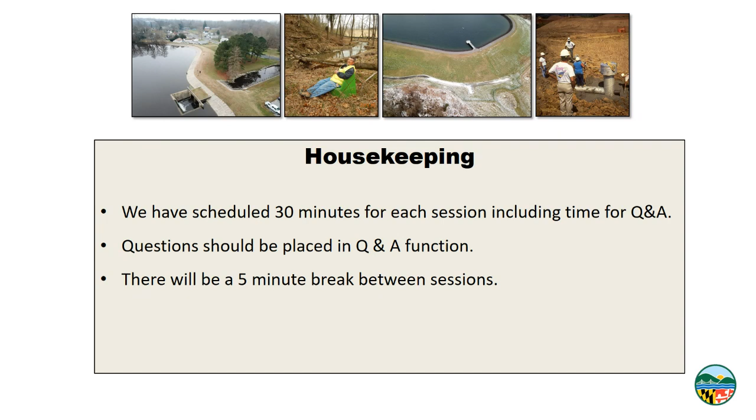Today's agenda is divided into 7 topics. First, Hal Van Aller will talk about hiring a dam engineer. Then Visti Dalal will talk about the lessons learned from the FEMA High Hazard Potential Dam Grant Program. Then we'll hear from John Roach, and he'll be discussing the permitting process. Hira Sharitha will talk about dam ownership and enforcement issues.

And dam safety issues at dams will be discussed by Kelly Flint. John Roach will then come again and talk about dam safety guidance documents. And then finally, Ray Barr will wrap it up with some closing remarks and any additional questions or answers that we have not addressed.

So let me just briefly talk a little bit about what Maryland's dam safety program looks like today in 2021. There are currently 627 dams on Maryland's dam inventory, and there are an additional 15,000 or so small ponds in Maryland. And these are the ones that we know about. There are new, existing, or unknown dams that are added every day to our inventory. Over the past 12 months, we have added 18 dams to the dam inventory that were previously unknown to us.

Maryland dams are spread out across the entire state. There is no county in Maryland that can claim that they do not have a dam within their jurisdictional boundary. The majority of dams in Maryland's dam inventory are low hazard structures, but there are about 250 dams in Maryland that if they failed, could cause significant property damage or kill somebody.

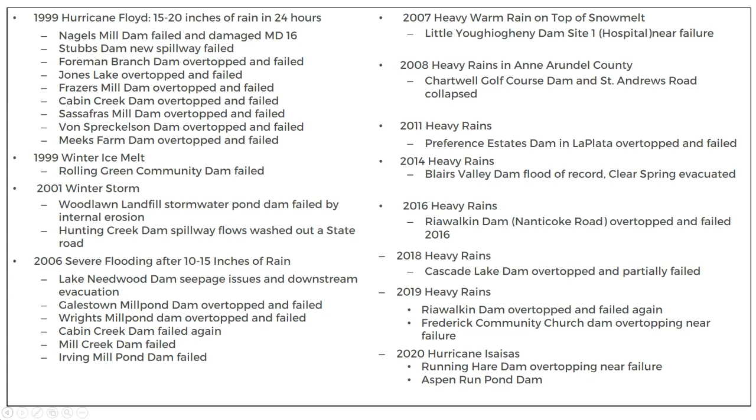Maryland's dam safety program works hard to ensure the safety of our dams and small ponds. And we do this by ensuring designs meet minimum standards, proper construction methods are followed, and our existing dams are maintained. We inspect existing dams and those under construction. FEMA requires Maryland to inspect our 102 high hazard dams once per year at a minimum, and our 148 significant hazard dams at a minimum one time every 3 years.

This year, our inspectors got off to a slow start when in March, Governor Hogan shut down the state due to the coronavirus and ordered all Maryland state employees to work at home. Things started looking better in the early summer when our dam safety inspectors were able to get out to do some field work, albeit with many safety restrictions, such as wear a mask, stay 6 feet apart, wear gloves, and only one person per vehicle. We were able to get to 170 dams. And this allowed us to meet the annual inspection requirement for 71% of our high hazard dams.

This is why your due diligence in performing regular inspections on your dams is critical. Maryland needs you because, as you can see, we struggle to meet our inspection goals. The same dam safety engineers performing those inspections are also reviewing dam safety permit applications, reviewing emergency action plans, providing outreach and training, and performing other critical duties.

What else have we been working on? In addition to dam inspections, our dam safety engineers have been working very hard on some important changes to our dam safety program. In February, we created a new dam safety permits division headed by John Roach. This division will help focus on permit processing updates to ensure efficiency and clarify requirements. We created 11 technical policy memos to help clarify some existing criteria that is difficult to interpret. These are located on our website, and I think John Roach will talk more about these later today.

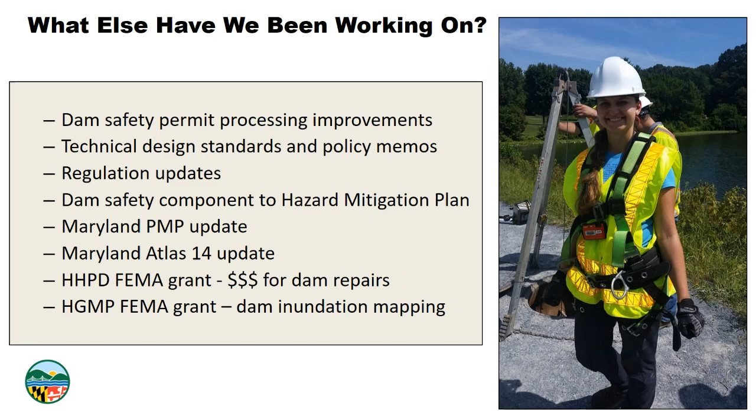Now, as some of you already know, our review responsibilities in the Dam Safety Division have recently had to extend more and more to small pond reviews. Historically, dam safety focused attention on larger dams that present a significant or high hazard, with 378 small pond reviews left to local soil conservation districts. However, circumstances recently have required many of these 378 reviews to shift to MDE through the dam safety permit process. This has impacted the local development process, and as a department, we are working through these issues. We are working to propose regulatory changes.

We also held 3 workshops in the fall of 2020 on small pond design, construction, and maintenance issues. We held a number of small pond coordination meetings and continue to hold these meetings with the local soil conservation districts to discuss small pond approvals and design criteria. And also, as a part of our regulation update, we recently published proposed regulation changes to the delegation authority for small pond approvals to allow MDE to designate an entity other than a soil conservation district to approve small ponds.

We are also currently discussing thermal review issues with the Department of Natural Resources for small ponds located in natural trout watersheds. And we hope to get some written guidance for local review authorities and soil conservation districts on what is required for small ponds located in these cold water streams.

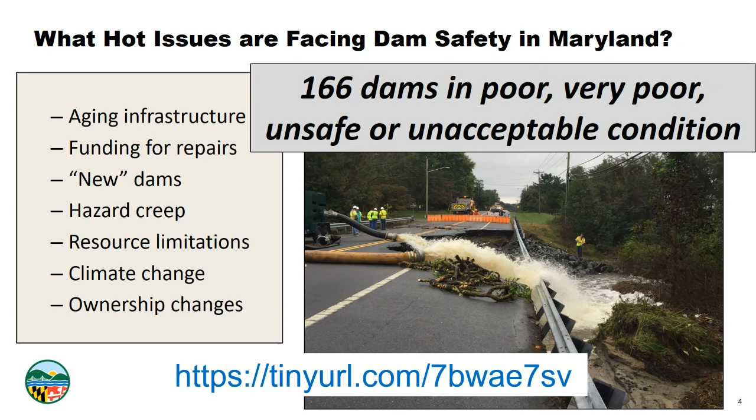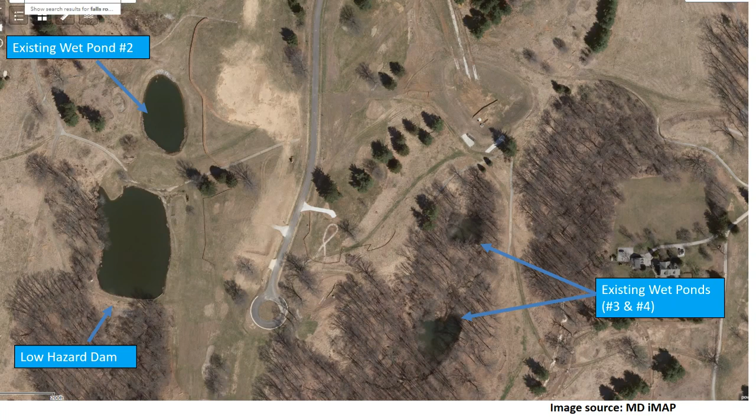Here's another recent example. In this case, there were 4 old ponds on a large parcel. One of these ponds was on Maryland's dam inventory. Now, recently, this large parcel was approved for a residential subdivision. Multiple single-family lots were created and sold, some that bisected the ponds and the low hazard dam. The property owners of the new lots had no idea they were now dam owners. In addition, forest conservation easements were recorded over these existing dams.

For those of you who are engineers providing design services for developers, please recognize that any existing dam or pond on the property must be maintained in good condition, even if it is not going to be used to manage new development stormwater runoff. Repairs to these existing structures should be required as part of the subdivision process. If you find one of these structures and you are concerned about notifying the existing property owner of the issues, contact MDE. We can assist with ensuring compliance.

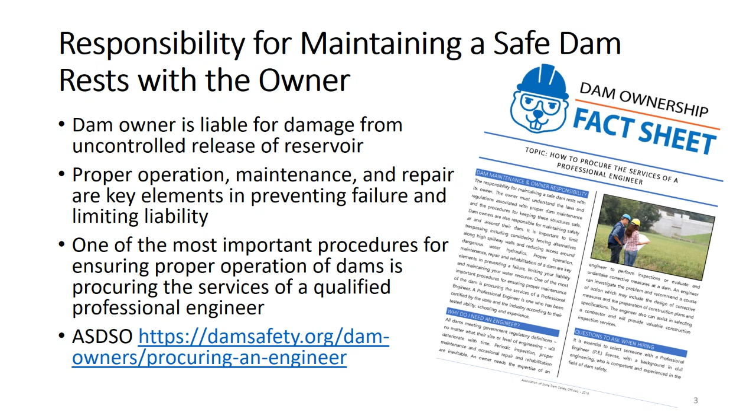There are some things that are not required to get a permit or an engineer, such as removing debris from a spillway, removing accumulated sediment from forebays and low flow openings in your spillways, replacement of construction joint sealants, maintaining existing toe drain systems or internal drain systems, or installing seepage measurement devices, operating and exercising drain gates if you're just going to open and close it to make sure it works,

replacing riprap, erosion protection material on the upstream face of the dam up to 10 square yards, and filling in animal burrows. These are all things that we expect dam owners to do. There's more details that you can find on all of these activities, ordinary activities, in MDE Policy Memorandum number 11.

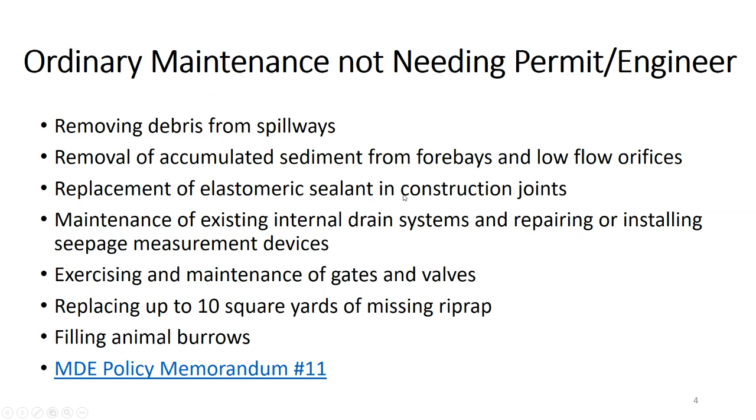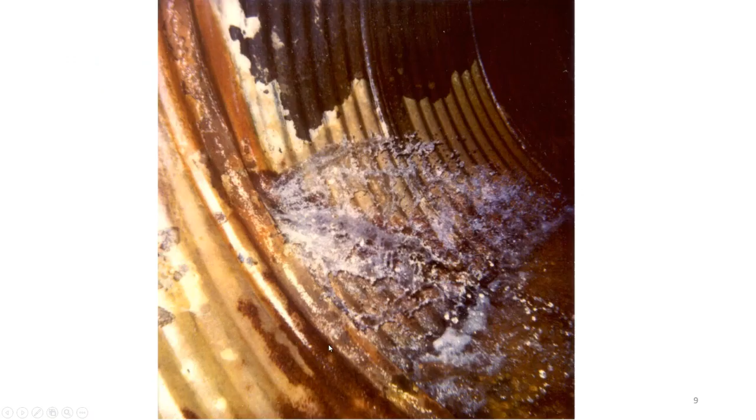If you inspect your pipe and you find some leakage, you're going to need help from an engineer. Here's one where the pipe is about a 48-inch diameter corrugated metal pipe installed in 1964 in Carroll County. The soils in Carroll County and a lot of parts of the state are very corrosive and aggressive, and corrugated metal pipe only lasts about 25 to 30 years. So this is well beyond its expected design life.

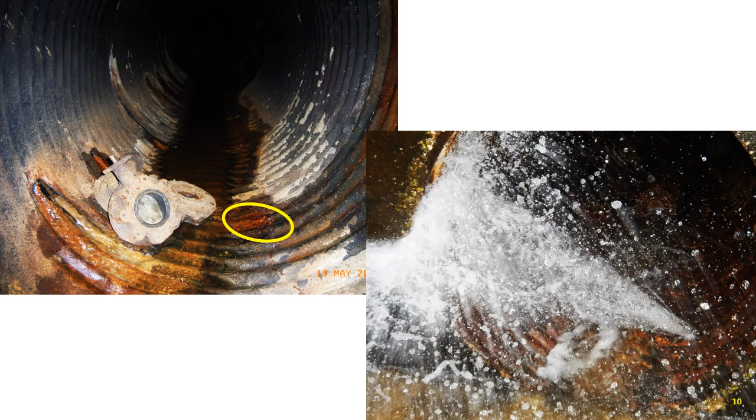When we looked at this dam in 2010, you could see corrosion. Right here in the circled area, there is a little bit of orange color and deterioration. But when we looked at that pipe again in 2017, that circled area had completely failed, and there was about a 2-inch diameter hole where the reservoir was coming into the pipe.

Let me just check. I'm getting a lot of messages here. Should be okay.

So the problems that do require an engineer. If the state has done an inspection and we've said that your dam has an inadequate spillway, it could be a change in hazard classification called hazard creep. As Jennifer mentioned, maybe a subdivision has been built around and downstream of an existing pond. So the pond now becomes a dam that might be something other than low hazard. If you look in COMAR, the spillway capacity requirements for a significant or high hazard dam are much larger than for a small pond.

We might have determined that the emergency or auxiliary spillway is subject to erosion. There have been a bunch of failures of large NRCS type dams with earth emergency spillways that failed by erosion when they were called into use during a large storm. In some cases, a 50-foot high dam with an emergency spillway failed all the way to the bottom of the dam and the entire reservoir was lost. It's possible to increase your spillway capacity by putting overtopping protection on a dam, but that's tricky, requires special design and an engineer that knows how to do it.

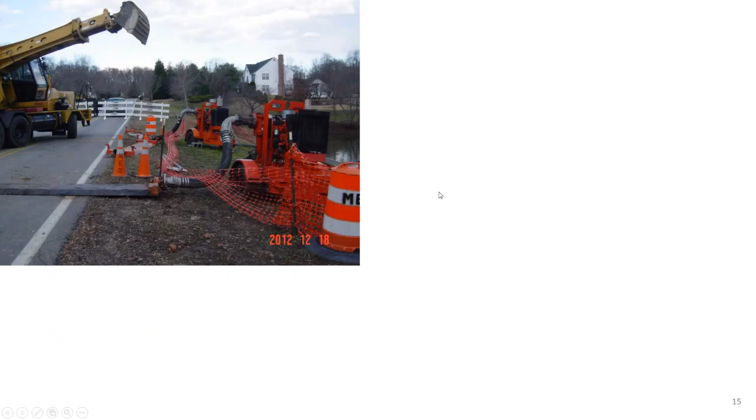There's a case in Calvert County where the dam serves as a community roadway, and the engineers elected to replace the deteriorated pipe with a slip liner, not replace it, but to repair it in place, because they didn't want to disrupt the traffic on the road in the community. However, a few months after the slip lining project was completed, we got a call from the homeowners association that said every time it rains, the lake level increases and it never goes down, and there's no water coming out of the pipe. What's going on?

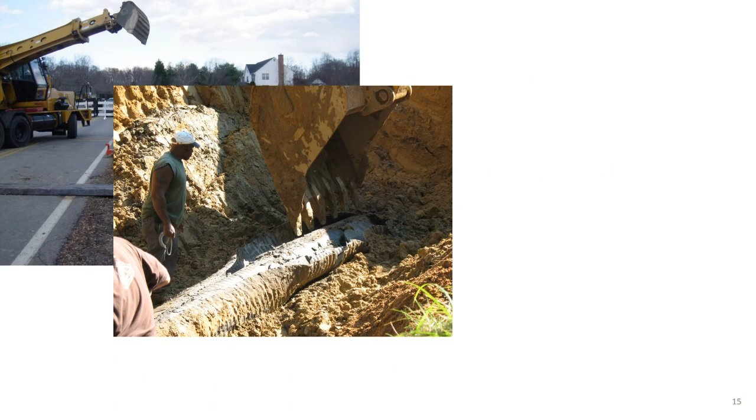So they had the engineer and a contractor come back, and they had to dig up the pipe because there was obviously a problem with it. No water was coming out. And this is at the downstream end. Corrugated metal pipe was excavated, and they split it open and found that when the contractor was pumping grout into the annular space between the old CMP and the new liner, they used too much grout and too much pressure and actually collapsed the brand new slip liner and filled the pipe up with concrete, basically, so that there was no way for water to get out. So they ended up digging up the road anyway to replace the pipe.

This particular incident resulted in the recommendations in our guidance document for slip lining to make sure that somebody is watching the conduit from both ends, or at least that you can see through it while the grouting is going on, to make sure they can stop in time before the pipe is completely filled with grout.

Lots of problems with pipes. Here is a dam that was constructed in Missouri. It was a pretty large, like 24-inch PVC pipe that the contractor installed as a temporary diversion pipe that they diverted the stream through while they built the embankment. And at the end of the project, the contractor and the owner decided that they liked having this PVC pipe through the embankment as a low flow opening. So they approached the state for permission to maintain it instead of grouting it closed like the construction documents required.

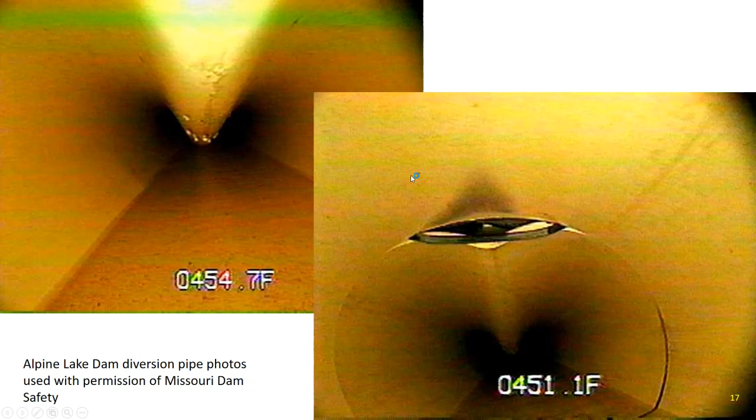So Hira and John are going to talk a little bit about permit requirements for dam construction, alteration, and repair. Maryland law requires that a permit is required for construction or alteration of a dam, any changes to a dam, unless the plans are approved by the Soil Conservation District. And as Jennifer mentioned, there is a change that would allow certain designated entities to do pond approvals, but we have not entered into any agreements with any entities yet to do that.

A dam safety permit is required to drill borings in or near a dam. John's going to talk about a near failure of a dam in New York State. COMAR, the Code of Maryland Regulations, requires that one engineer, which we refer to as the engineer in charge, be responsible for an entire project from its design, that's from doing the original concept and borings, through its construction. The engineer must be a registered professional engineer, experienced in dam design and construction.

So very few times will one engineer be experienced enough in all phases of construction: geotechnical, hydrology and hydraulics, and structural. So we usually see a design team involved in the project, but one engineer must be designated as the primary engineer in charge. And he should be reviewing all of the submittals to the state, the breach analyses, a hydraulic design, a structural design. It may be done by different people, but it should all come under his authority.

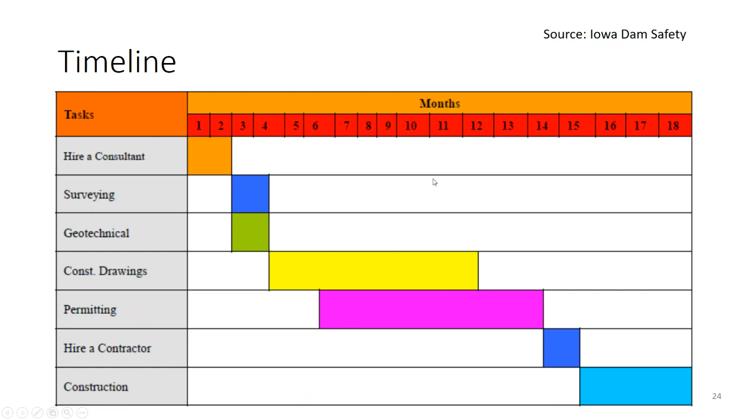So it's recommended that you get references and a portfolio of projects from your engineer and contact those owners and contractors to discuss the engineer's performance. Look at the projects that have been completed under his leadership. And keep in mind that an engineer that claims he's worked on a lot of Maryland 378 type stormwater ponds might not really qualify them for work on high hazard dams. They might be qualified, but somebody that's worked on dozens of small stormwater ponds does not necessarily translate into experience for high hazard dams.

Discuss engineer selection with the dam safety program before you actually pick that engineer and get under contract with them. We can't recommend any particular engineer, but we can give you an assessment of their experience on previous projects. And if the engineer has come up with a recommended course of action, run that by us before you commit to that, because there may be some things that we're not going to approve.

And go to ASDSO's website, and there's other websites, but go to the website about the basics of dam safety and be knowledgeable in regard to the laws and regulations with which you need to comply, so you know if the engineer is going to satisfy those requirements.

Other activities that might require an engineer: annual dam inspections. Certainly dam owners are expected to do inspections of the dam, but you should probably have an annual inspection done by a qualified engineer. And we're also suggesting that every 5 or 10 years an engineer do a top to bottom inspection and evaluation to look at the original design assumptions, evaluate the spillway conduits, geotechnical conditions, slope stability, foundation, seepage,

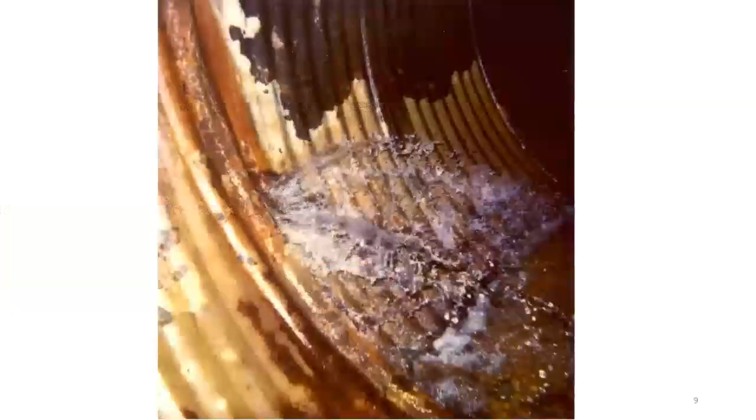Should that be from the top of the dam to the invert of outfall elevation? I think it's before this. Keep going. Before this, like maybe 1 or 2. There it is. Yes. Okay. So that is a very good question. Okay. Are you finished with the? Yes. Okay. Yes, I'm sorry.

It was built by an environmental contractor that was good with landfill remediation, but they didn't know anything about stormwater ponds, and the engineer that was involved was an environmental engineer and didn't have any background in dam safety. The height of the dam measurement is a big issue that we hope to clarify. I think it might be in the guidance documents that John has put together and that are on our website now. And I think NRCS measures it to the middle of the embankment. So anyway.

Okay, the next question, Hal, is you mentioned CMAC. The question is, what is a CMAC device and what does CMAC stand for? There was a written response that says CMAC stands for Continuous Monitoring and Adaptive Control Ponds. Trademark names include Opti, Smart Pond, and Real-Time Control. Did you want to add anything to that, Hal?

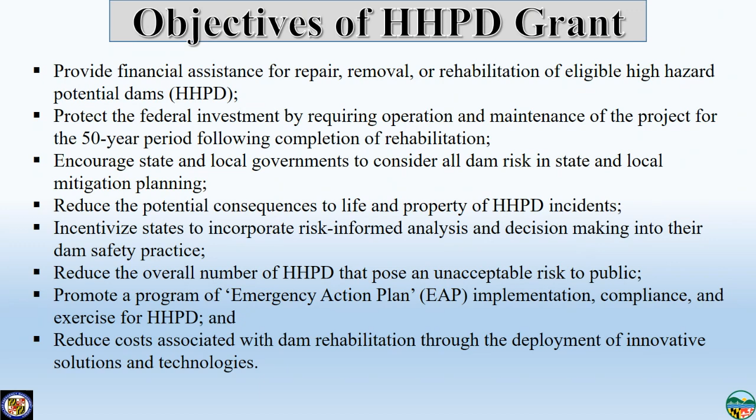Now, this is the $1 million question. Who is eligible for this grant and who is not? All federal dams are not eligible for this grant. Dams built by USDA, Department of Agriculture, those dams are not eligible. Projects that increase water supply storage capacity, they are not eligible.

You cannot use this fund to just do regular maintenance and repairs to your dams, even though they are high hazard dams. Any modification to a dam that does not improve the safety of the dam, that's a big condition. And the onus has been provided to the dam safety program for each state. We have to determine if that dam is unsafe or not.

And we go through the whole rigmarole to find out if those dams are unsafe. And only then we make them eligible for this grant. So it's a very intricate and detailed process by which the dam safety program delineates the dams which are eligible for this grant. Licensed hydroelectric dams, modifications to produce hydroelectric power, those dams are not eligible either.

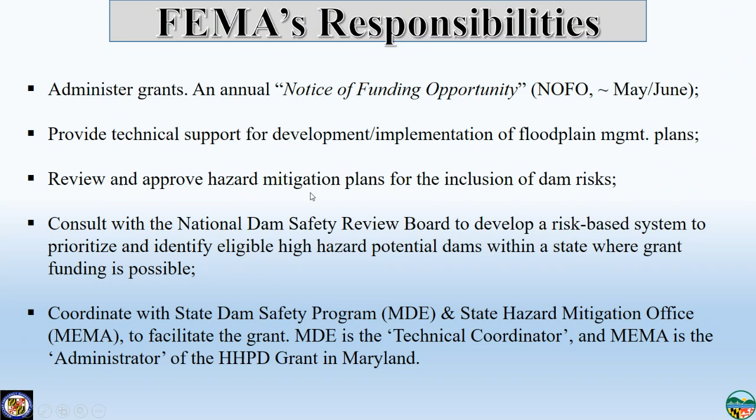They coordinate with our sister agency MEMA and with MDE to make sure that all the I's are dotted and all the T's are crossed before the award is given. So working with FEMA has its own ups and downs. What is the role that MDE plays in this grant? We are the technical coordinators. I am the manager of this grant at MDE. We develop and prioritize the list of unsafe dams, high hazard dams in Maryland.

Last year, we spent a considerable amount of time going over the dams we thought were unsafe. We read through the reports, technical reports. We talked to the managers of the dam, made sure they were aware of this grant, as well as they wanted to work with us on these projects. So they were on board to apply for this grant because there's a big commitment from them to do all the things that I'm going to go over.

The first thing is there's a cost share of 35%. So it can be in cash or in kind. And the dam owner has to make the decision whether they have the resources and the time to commit to this funding. They need to have an updated EAP we talked about. They also need to have a county-wide hazard mitigation plan. Now, if you don't have that hazard mitigation plan, that's a lot of time investment as well as the cost.

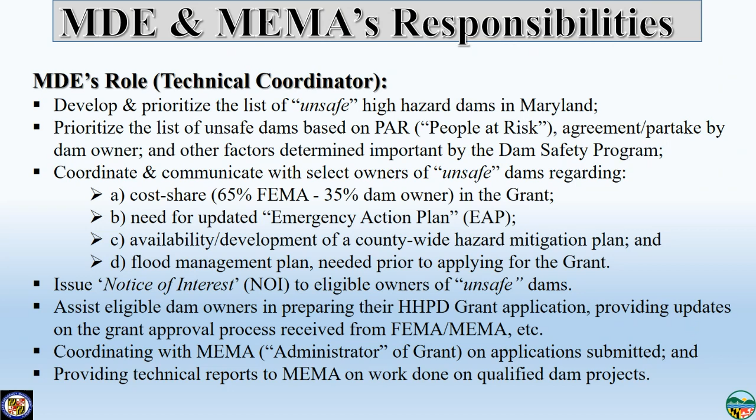So what is MEMA's role? MEMA is our administrator, and we are very happy that they are on board because we do not have the resources that MEMA has. MEMA works with FEMA on several grants. So they have the medium of not only communicating with FEMA readily and efficiently, but they also have the grant application process down pat. They know how the money comes in, how the money goes out. And so we are very happy and appreciative of MEMA's role as an administrator of this grant, and we work closely with them.

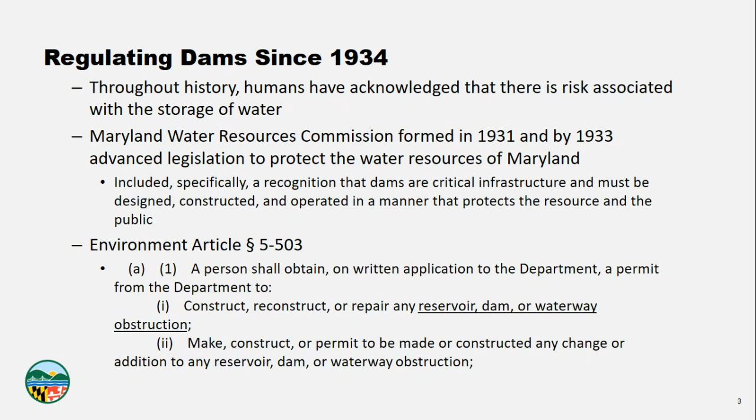In fact, the law, while the language or maybe the citation has changed slightly, is still largely the same. It still says that a person shall obtain a permit to construct, reconstruct, or repair any reservoir, dam, or waterway in the state of Maryland. And that language is important too, because notice it specifies reservoir as well as dam. So changes in the area that's being impounded by the structure could trigger a requirement for a permit as well.

So this regulation provides the state with checks and balances to ensure the needs of water users as well as the downstream public are protected. Permitting helps ensure that alterations to a dam become part of its permanent record, right? These structures last not 5 or 10 years, but decades, maybe centuries or longer. And we keep a permanent record on each dam, and owners and their engineers refer back to that history as they're doing a rehabilitation or repair project, because it enlightens you on how this project was constructed and operated over time.

Permits also provide the opportunity for public comment. People should be aware; there's kind of a community right to know. If you're building a high hazard dam in their community, people at least need to be aware of that risk that exists out there.

Now, in our current format, the permits that we issue in dam safety also serve as an operating permit. Some states do it differently, where they'll have an operating permit, which is different than a construction permit. At the moment, ours is one and the same. So when a project is done being constructed, the permit doesn't go away per se. It lives on through those operating and maintenance obligations for the owner. So that's how we ensure that dams continue to be operated and maintained acceptably.

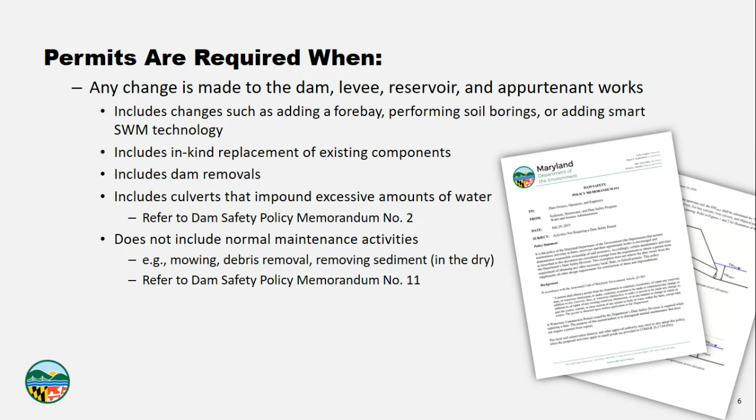We've spelled out a list of some of these normal maintenance activities in our policy memorandum number 11, so you can refer to that. All of these policy memorandums that we've discussed, that we'll be discussing today and on Thursday, are available on our website right now for you to refer to.

So the question then comes to, is it a dam or a small pond? If you have a dam, you need a permit to be issued through the Maryland Department of the Environment Dam Safety Program. If you have a small pond, you probably can receive approval by the local soil conservation district. And notice the language is a little bit different there. It's an approval versus a permit. And there's some things in law that have some slight differentiations between the two.

So how do you know if you have a dam or a small pond? Well, if the answer to any of the four following items is yes, then you have a dam and you need to go through permitting through dam safety. So if your height is over 20 feet tall, measured from the downstream toe to the crest, you have a dam. If you have a drainage area over 1 square mile, you have a dam. If you can store more than 50 acre-feet of water, and that's up to the brim-full elevation, you have a dam. And lastly, certainly, if you have a high or significant hazard structure, it's a dam as well.

Now, if you answer no to all of those, it's a small pond, and you can probably receive approval by the local soil conservation district, or for state and federal projects through the plan review division here in MDE. But there are a few quirks in laws and regulations that we have to be aware of. So if you have a pond located in a Use 3 watershed, you need to get a permit from Dam Safety. Jennifer touched on this a little bit. We have a regulation change underway right now to remove this requirement and allow small ponds in Use 3 watersheds to be approved by the SCD. So that will change, hopefully in this calendar year.

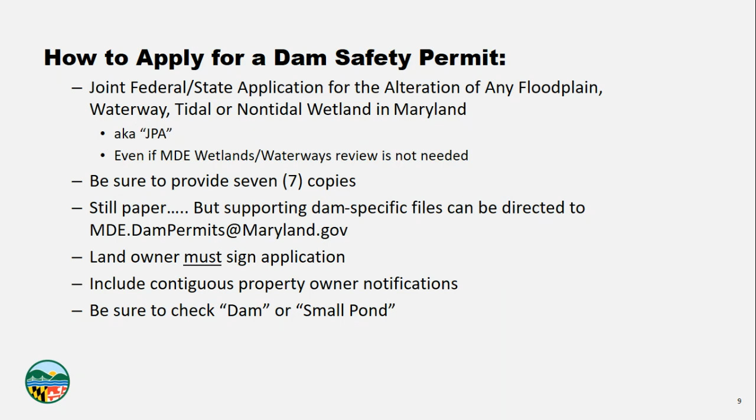I'd also note that you want to include contiguous property owner notifications. And a lot of times people say, well, this is a repair job or a maintenance job, and there's boxes to check in the joint permit application, the second page, about type of work. Please check that dam or small pond box if you have one of those on your structure. It just helps ensure that when these are screened by MDE staff and then routed to all the appropriate divisions, dam safety gets it. They're pretty good, but occasionally projects slip through the cracks. And if it slips through the cracks and we don't get it, that's time wasted on everybody's part. So we want to make sure it gets automatically routed to dam safety.

Okay, so that's the who, what, where, when, why, and how. Now we're going to talk about what do you need to submit. And that's another question we get a lot. Part of this has been addressed on our FAQ on our website, but we'll dive a little deeper. So what do you need from us to get the permit? And I will note that it does kind of depend on what you're doing, right? A permit to construct a brand new high hazard dam is going to be different than a slip lining project for a small dam or a concrete maintenance project on a medium sized dam. So it does depend generally on what the project is.

That's why it's important to hire a qualified engineer and work on a mutual scope development. And when I say mutual scope development, I don't just mean between the owner and the engineer, but sometimes bringing dam safety in early is really important. It can help build familiarity with our understanding of the project, but we can also advise on scope or permitting expectations based on past project experience, and provide our best professional insight to help you make sure that the project will get off the ground and go smoothly.

On occasion we request information for review, and engineers say, well, that wasn't in my scope. And to be quite honest, that's not our problem. It's something we need to do the review, so we need to make sure that we avoid those issues or prevent them altogether, to make sure that what you need to submit is known early on in the project. That being said, here are some general submission expectations.

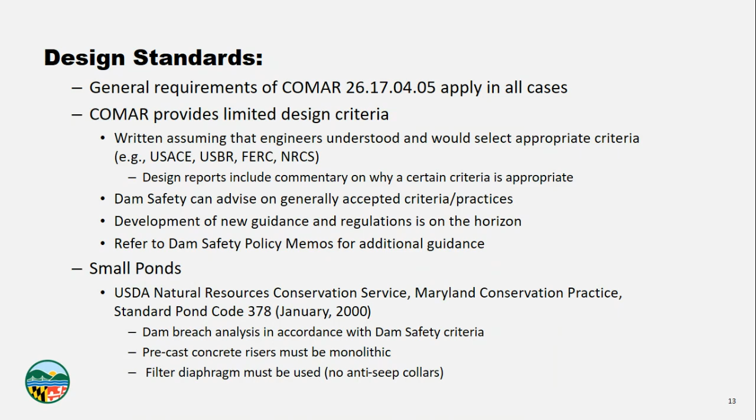And lastly, anti-seep collars are a no-no. They've basically fallen out of favor with federal agencies and many states, now going on almost 40 years. So we're looking to see filter diaphragms be used.

All right, let's talk a little bit more about the engineer in charge. Hal mentioned this briefly earlier. The engineer in charge is a regulatory requirement, and they're basically responsible for ensuring that the design and construction conforms to the high standards of competence in the specialty of dam design and construction.

For all of us who are engineers out there, a lot of this stuff wasn't taught in college. It's experience gained through mentors like Hal Van Aller, who we're going to miss so much, and other colleagues, knowledge sharing, educational seminars like that. So we're looking for that engineer in charge to have obtained that experience during their career. And we want them to be responsible from project planning to construction closeout.

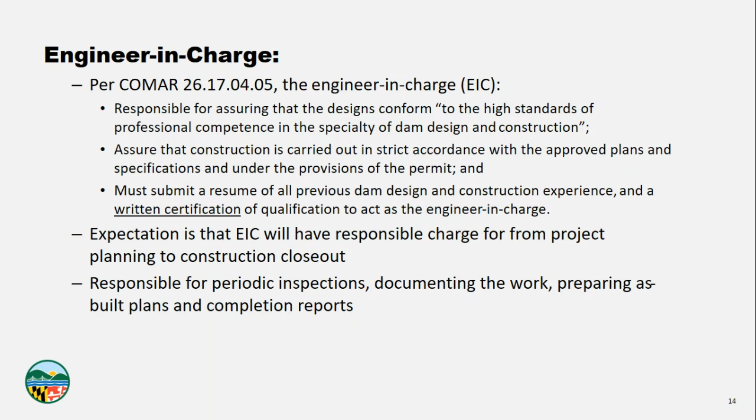One point of contact, so that let's say a design change needs to be made in the field, the person who's aware of all the design considerations during the project planning should approve that design change in the field, because if you make that design change without referring back to the designer, you may be missing something. There may be a gap there, and that can cause problems. And this engineer in charge is also responsible for coordinating periodic inspections of the construction, documenting the work, and preparing the completion documentation as well.

All right, the Memorandum of Land Restrictions. I want to talk about that also briefly because it's kind of a mystery to some folks. The Memorandum of Land Restrictions is actually required by law when you get a permit from dam safety, so it's not something that we can waive. It's a document, it's a legal instrument that's filed with the land records on the property or properties upon which the dam is located. And basically what it says is that as a dam owner, I affirm that I will abide by the applicable laws, regulations, and permit conditions, provides right of entry for dam safety to perform our necessary duties. But most importantly, we think, is that it helps ensure that future owners are aware of their obligations.

So when they do a property transfer and perhaps there's a title search done, which is fairly standard practice, this should come up flagged to that parcel, and the owner will be able to be aware of their obligations. That's so important. As Jennifer mentioned, these farm ponds, which are passed from farmer to developer, now to HOA, there's a disconnect and people lose the understanding of what their obligations are. Because it runs with the land, it must be signed by the dam owner.

And I will say that certain entities, I don't mean to say they're more sophisticated or not, but some owners, because it's a legal instrument, will want to go in depth and have this reviewed by lawyers and do deed searches and all that stuff, and it can cause project delays. Some owners sign right here and get it notarized and they'll send it off. So be aware as you're planning your project, get that MLR out there early, not at the last minute.

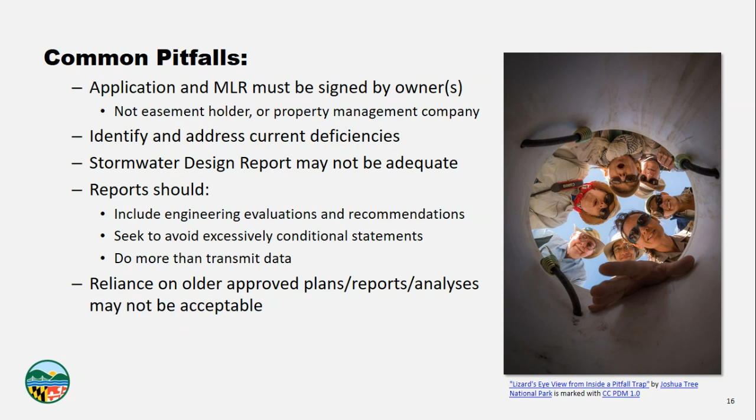Get that confirmation. Lastly, I want to say that while older plans, reports, and analyses are a huge wealth of information, reliance solely on those documents may not be acceptable or adequate. Things could have changed, hazard creep, you know, we've got old methods of analysis that may not be appropriate anymore. So use those, but remember to verify with updated current analyses.

Okay, so we're coming close to the end of the conversation here, and people always ask, well, how long is it going to take to get my permit? You need it now. I feel you, I understand that. As we all know, there's elements of work that add time, and there's elements of work that reduce time. Clearly, we're all working under the stresses of COVID, working from home, dealing with childcare issues. That is a universal time adder, let's say.

But we also have things that slow our work down, so I'm pointing them out just so that we can all, you know, right the ship a little bit. So things like the completeness of the application can slow us down. If we receive something that's not complete, it takes us longer. Also recognize that we have obligations to do coordination with other agencies and public notice, and those, because they're somewhat out of our control, can add time, and we have to factor that in. Lastly, of course, we all struggle with it. It's maybe not the best excuse, but our workload and permit volume can affect our turnaround times.

And Jennifer mentioned we're down quite a significant number of staff right now, but we are hiring and we're advocating for more staff. So things we're trying to improve is education and outreach like this, so you have a little more awareness. Our policy memos help provide a better roadmap for expectations. And then we're doing things like internal process improvement just to streamline work. We're looking for continuous improvement here, right? We don't want to just sit and sit and then all of a sudden launch a whole new system that may be great. We want to do incremental improvements. That's kind of the motto of our Dam Safety Permits division.

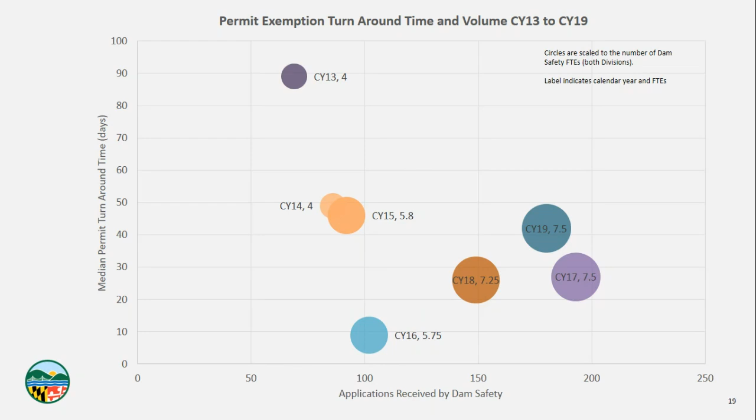Okay, so permit turnaround time. Now we're looking at this same setup. Median turnaround time on the vertical axis, although the scale is a little bit larger, and the number of applications received. Again, you'll notice we've staffed up in response to the larger amount of permit applications we've received. Unfortunately, those FTEs, you just see the number after the calendar year is our annualized full-time equivalents and staffing. It's now dropping below that 7.5 we've seen before, but we've been able to drive down permit turnaround times.

But this gives you an idea of approximately how long it takes for a, quote, typical project if we receive everything that we need to in a timely manner. I will say, though, let's say you are building a brand new high hazard dam, starting from scratch. A perfect example was in 2016 with the Mount Soma Reservoir in Harford County. It took, I think it was like 2 years and 3 days exactly from when we first started talking about the project. This is before they had even selected a site to issuance of the permit.

But there's so many things. We've talked about the pitfalls and other issues that can slow the turnaround time down. So it's a shared job, right? We're trying to do our best to be efficient and turn things around and respect the rules and regulations and safety of members of the state. But the better we can get from applicants, it helps us facilitate being efficient.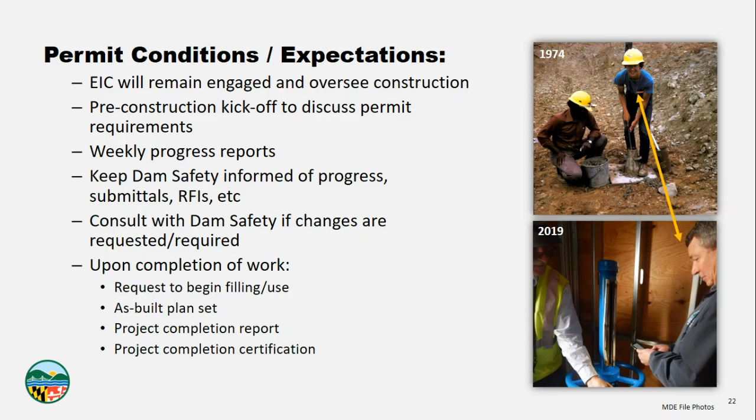And later on in these seminars, we'll talk about what's the role of engineers and dam owners as you operate and maintain your dam after it's been constructed. So that's what I have for you.

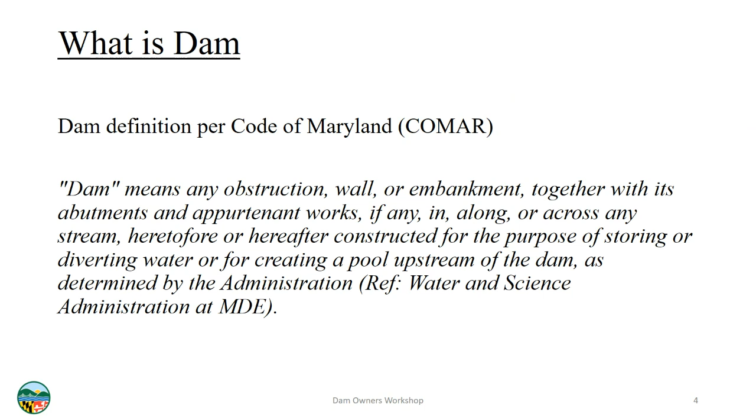the administration. The purpose of the dam might be public drinking water supply, irrigation, flood hazard control, recreation opportunity, power generation, and stormwater management facility. There are 3 types of hazard classification in Maryland: high, significant, and low hazard. Dam hazard is classified by the downstream hazard condition if failure of the dam occurs, not the structural configuration of the dam.

High hazard dams mean the probable loss of human life, and probable extensive property damage to residential, commercial, or industrial buildings and downstream roads. Significant hazard dams have the possibility of loss of life and possibility of property, road, and building damage. In a low hazard dam, loss of life and property damage is unlikely. There are 102 high hazard, 148 significant, and 358 low hazard dams in Maryland. In total, 627 dams.

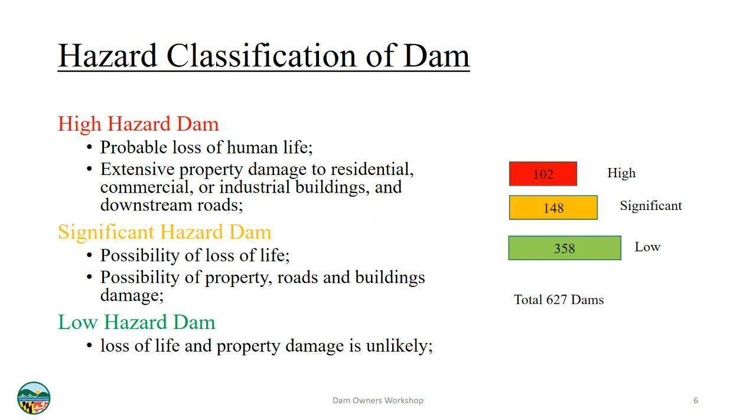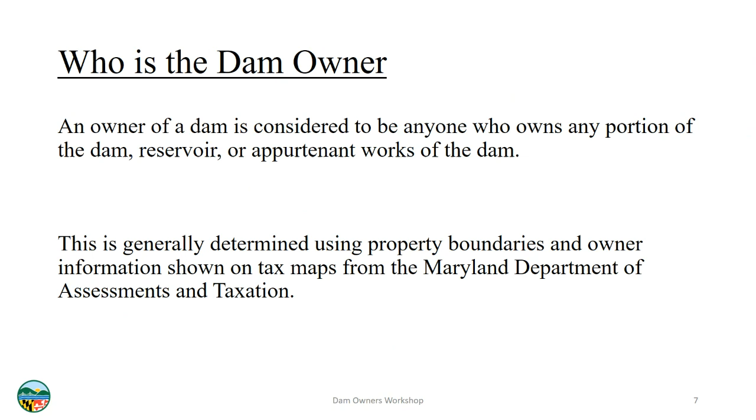Now the question is, who is the dam owner? The owner of a dam is considered to be anyone who owns any portion of the dam, reservoir, or appurtenant works for the dam. This is generally determined using the property boundary and owner information shown in the tax maps from the Maryland Department of Assessments and Taxation. Who are the dam owners? Types of dam owners might be federal, state, county and local government, water companies, private corporations, homeowner associations, multiple dam owners if the dam is owned by multiple property owners, and individual owners.

Now I'm talking about dam owner responsibility. Dam owners need to know the basics of the dam, regularly inspect the dam, and do the operation and maintenance of the dam in a safe and effective manner. They must understand the current laws and regulations associated with the dam, ensure public safety around the dam, have knowledge about the risks and liabilities associated with dam ownership, develop and update the EAP for high and significant hazard dams, and hire a qualified dam engineer for any engineering works. And they should be capable of financial planning to ensure adequate funds are available.

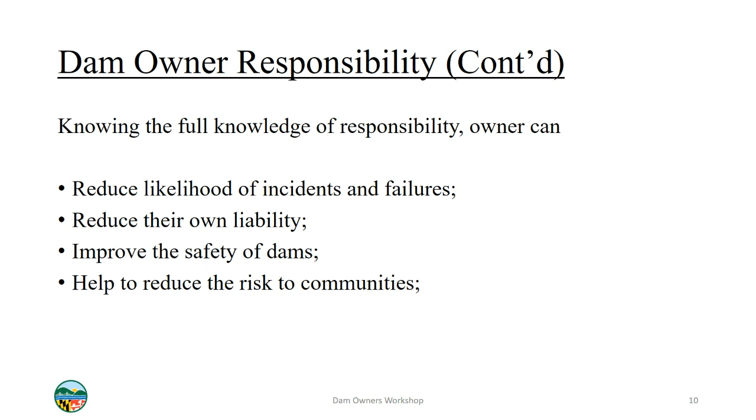With full knowledge of the responsibility, the owner can reduce the likelihood of incidents and failures, reduce their own liabilities, improve the safety of the dam and help reduce the risks to the community. On dam owner liabilities, the dam owner is liable for damage resulting from the dam's misoperation or failure that would result in a sudden release of water downstream. The owner can face reconstruction cost and possible liability for downstream damage. So safely maintaining a dam is a key element to preventing failure and limiting the liability the owner could face.

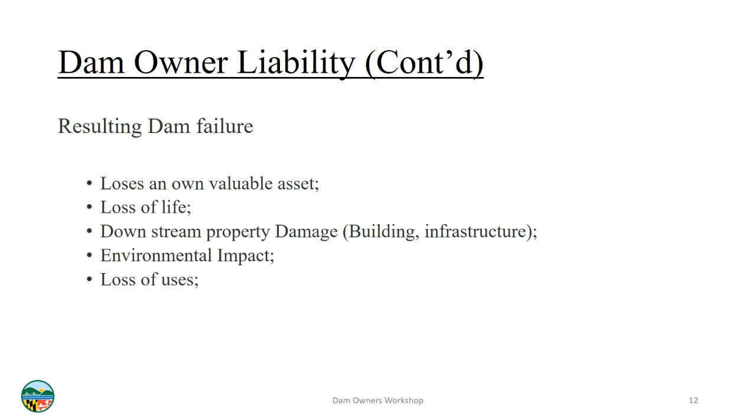Resulting from dam failure, there are losses of the owner's valuable assets, possible loss of life, downstream property damage, environmental impact, and loss of usage. Liabilities can be minimized by avoiding negligence, obeying the standard of duty, properly operating and maintaining the dam, keeping safe conditions in and around the dam, and updating the emergency action plan.

There are some common dam owner issues. Mainly in government organizations and public companies, the person in charge or manager changes, transfers or retires. In a homeowner association, the person in charge or the management might change. For the individual owner, there is transfer of ownership and sale of the property. So the new person in charge or owner will be unaware of the dam safety laws and responsibilities, and sometimes they do not inform dam safety who the new owner in charge is, and it's very difficult to contact the new owner.

I'm talking about the dam safety law. The dam safety laws are found in 5-501 through 5-514 of the Annotated Code of Maryland Environment Article, and the regulations of Maryland dam safety can be found in COMAR 26.17.04.05.

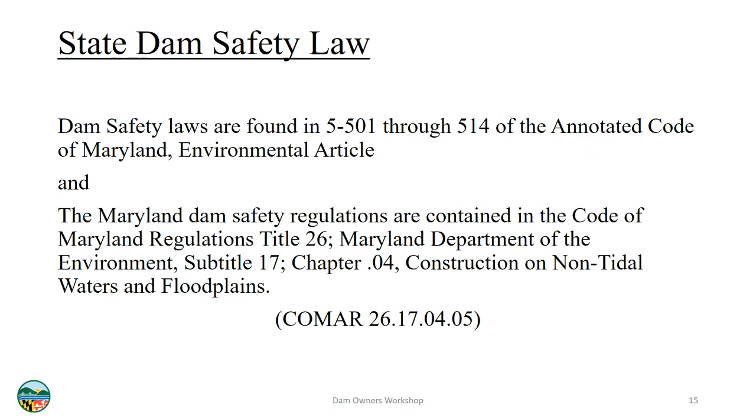And where do we find the enforcement law? The enforcement law we can find in Article 5-509B, which states that on complaint or on the department's own initiative, the department may investigate or examine any reservoir, dam or similar waterway construction. If the department determines that the water infrastructure asset or the dam is unsafe, needs repair or should be removed, the department shall notify the dam owner to repair or remove the dam as the situation warrants within the prescribed time period.

Some basic enforcement steps. The first one is the inspection finding report. This inspection is done by the dam safety staff periodically depending upon the hazard class. In this report, they will ask for certain action within a certain time frame and educate them why this is important. The second is the strict inspection report. This is more legal language, setting very specific actions and times.

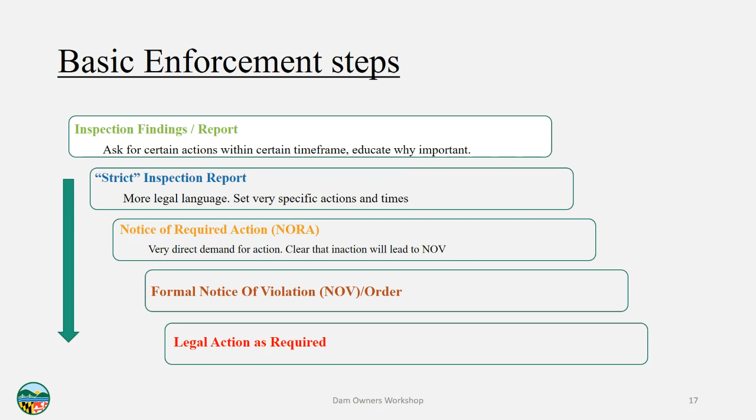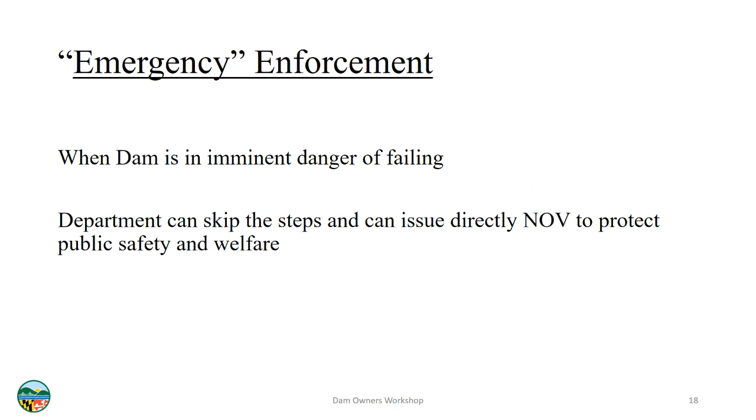One is the notice of required action, a very direct demand for action, making clear that inaction will lead to the NOV. Then the formal notice of violation, and then lastly legal action if it is required. Sometimes when the department feels that the dam is in imminent danger of failing, the department can skip the steps and issue an NOV directly to protect public safety and welfare.

So now I'm going to talk about some cases of enforcement issues in 2020. Case one, the dam owner is St. Mary's County, and this dam is located in St. Mary's County. It is 11 feet tall, 120 feet long, with a 3.1 acre pond area and 3.3 square mile drainage area. And this is a low hazard dam.

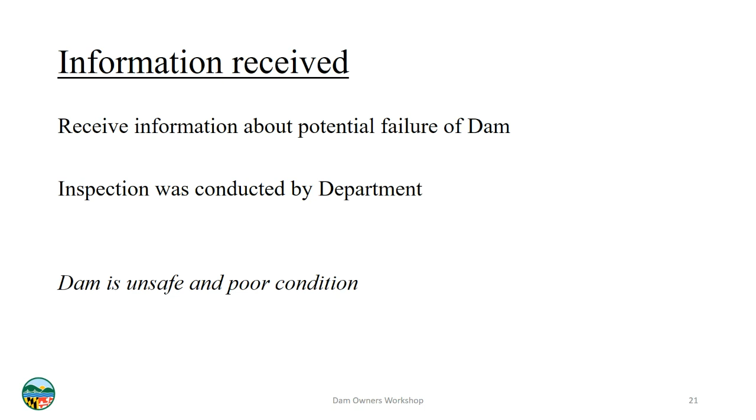The department received information about the potential failure of the dam, so the department conducted an inspection. After the inspection, the dam was found unsafe and in poor condition. These are some findings; I'm showing the photographs. This is the lake level at the time of the inspection. And there is a big sinkhole on the upstream side of the dam near the spillway pipe.

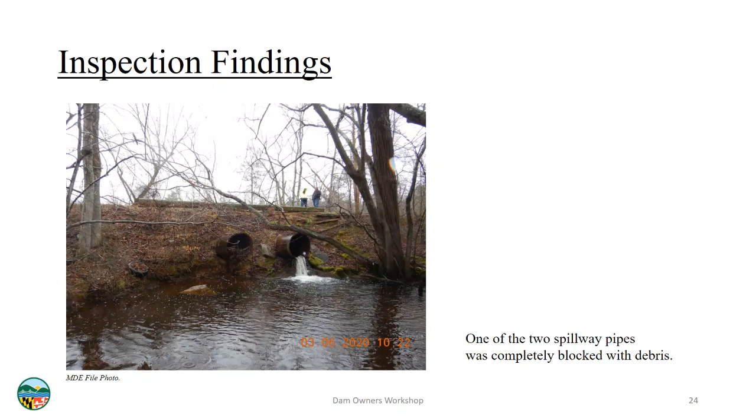And one of the spillway pipes is blocked completely. And there are two wet areas; it seems to be seepage on the downstream side of the dam. And there are numerous trees and woody vegetation on the upstream and downstream slopes of the dam.

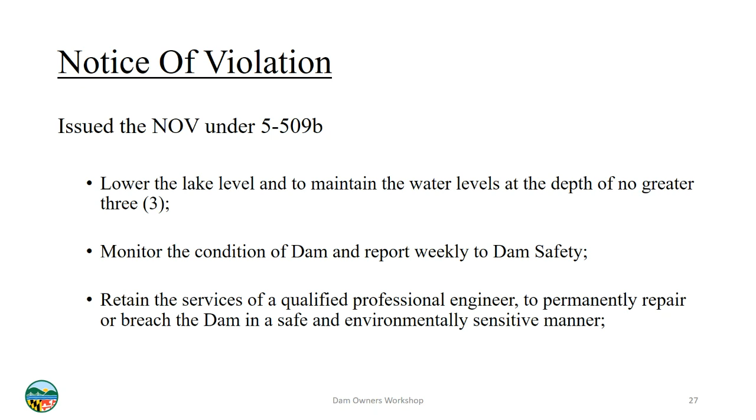So the department issued the NOV under 5-509B to lower the lake level and maintain the water level at a depth no greater than 3 feet, monitor the condition of the dam and report weekly to dam safety, and retain the services of a qualified professional engineer to permanently repair or breach the dam in a safe and environmentally sensitive manner.

And these are the weekly reports that the department is receiving about water surface elevations and the condition of the dam in the eroded area. And the lake water level was lowered by using a siphon and the existing spillway pipe.

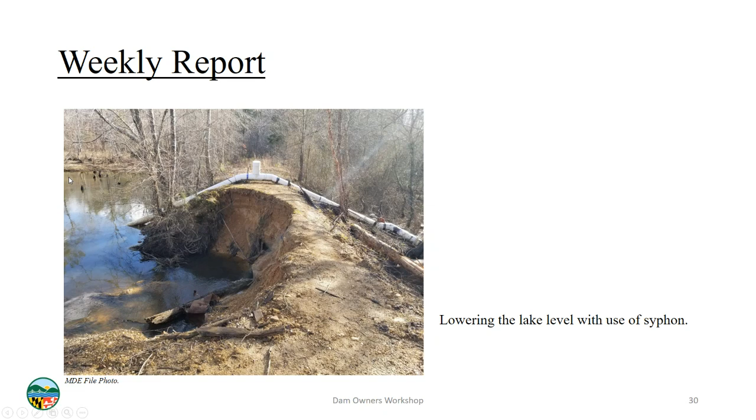Case 2. This is the privately owned Autumn Dam, located in Calvert County. It's about 20 feet tall, 300 feet long, with a 6.8 acre pond area and 0.5 square mile drainage area. This is also a low hazard dam. This dam is associated with the access road to the vineyard, with about 100 vehicle passes per day during events.

In 2019, dam safety inspected the dam and the following findings were found: numerous trees and vegetation upstream and downstream, seepage at the downstream side, and the capacity of the principal and emergency spillway is inadequate. So the department notified the dam owner with a strict inspection report with a prescribed time period.

To remove all the trees and woody vegetation from the dam and establish a healthy stand of grass in their place. And retain the services of a qualified professional engineer to study the spillway capacity and prepare the remedial design as necessary for the spillway, trash rack, and seepage control. And remove fill on the emergency spillway channel to restore the emergency spillway capacity.

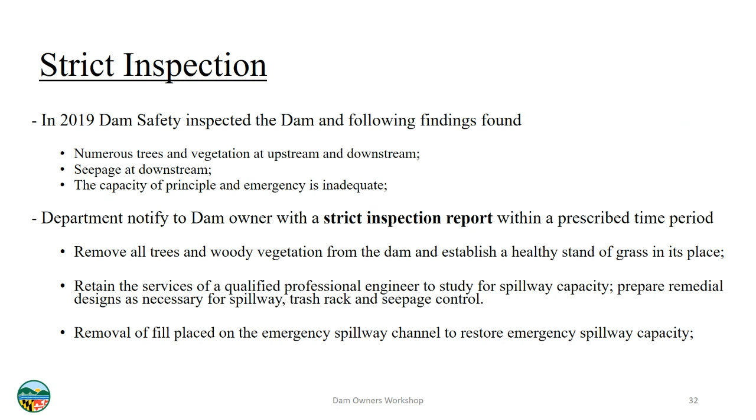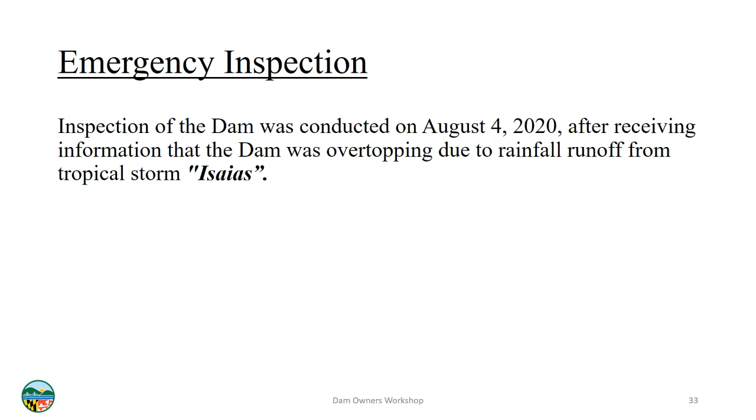Emergencies. On August 4, 2020, the department inspected the dam after receiving information that the dam was overtopping due to rainfall runoff from Tropical Storm Isaias. So dam safety went to inspect, and at the time of the inspection, the water level was almost at the top of the dam.

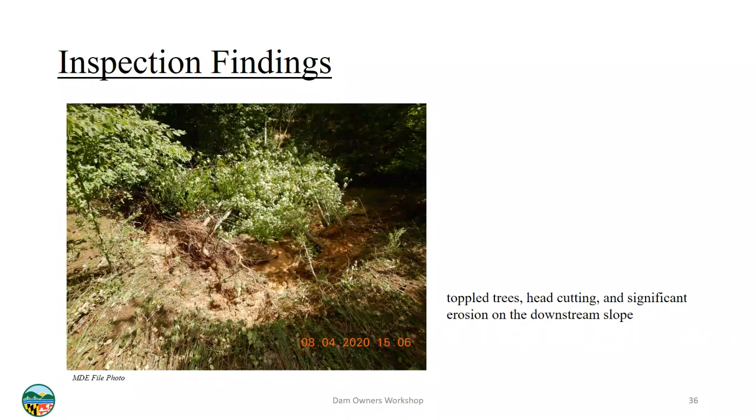And there is evidence of overtopping of the dam on the downstream slope. And there is a huge sinkhole. There are toppled trees, head cutting, and significant erosion on the downstream slope. And there are numerous trees and woody vegetation upstream and downstream of the dam.

So the department issued a NOV under Article 5-509B to maintain the water level 5 feet or greater below the normal pool elevation, perform the emergency repair work to stabilize the head cut erosion area, remove all the trees from the upstream and downstream slopes of the dam embankment, retain the services of a qualified professional engineer to perform a comprehensive investigation of the dam, including spillway capacity and seepage control, and apply for all other necessary environmental, construction and grading permits and complete the approved repair.

So emergency work was performed and the lake was lowered by using this pump. The sinkhole erosion area was filled with gravel, and all trees and woody vegetation were removed from the upstream and downstream slopes of the dam.

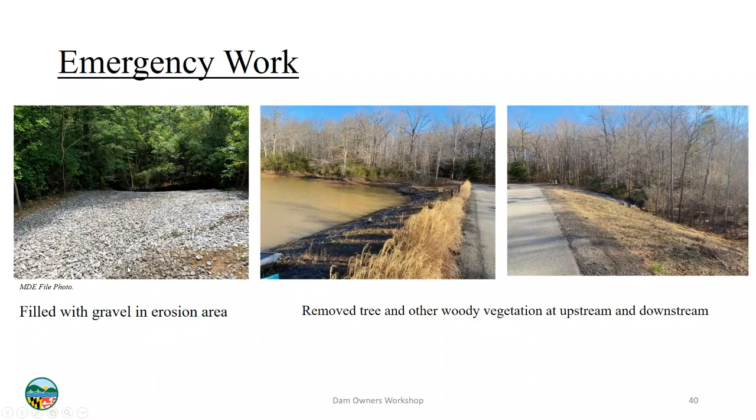Case 3, this is the private one, Autumn Dam. There are multiple property owners, as you see in the photographs. This is located in Carroll County. This dam is almost 16 feet tall, 1,000 feet long, with a 6.5 acre-foot pond area. It is located in a U3 watershed. It seems to be low hazard, and this dam is not in the dam safety inventory.

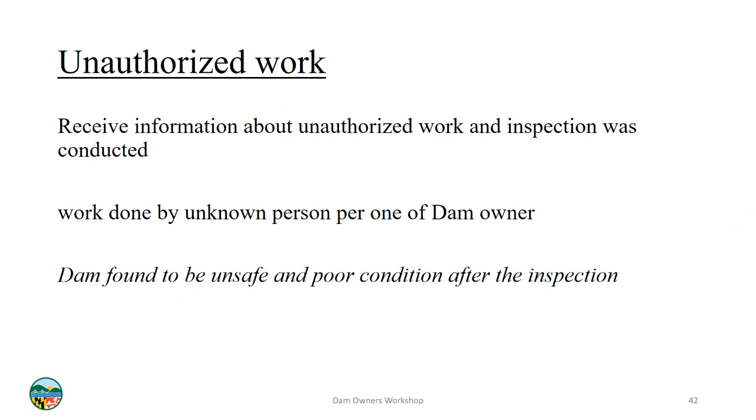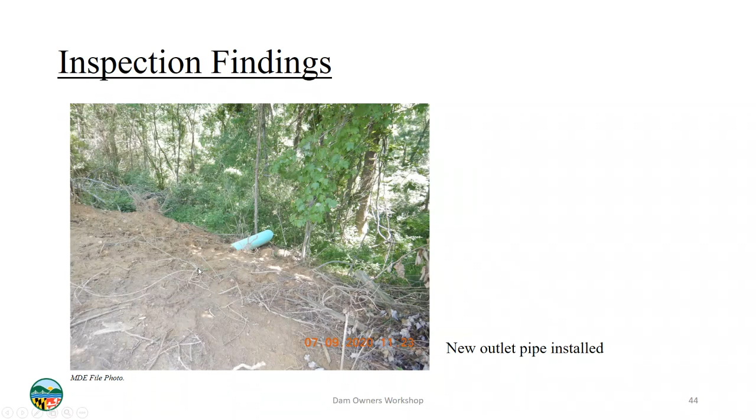The department received information about unauthorized work, so the department conducted an inspection. The work was done by an unknown person per one of the dam owners, and the dam was found to be unsafe and in poor condition. These are some findings: the upper portion of the riser toppled and the spillway riser was plugged with mulch bags and rocks. During inspection, a new outlet pipe was installed over the top of the existing pipe, there is a lot of bare land as evidence, and there are numerous trees and vegetation all around the dam.

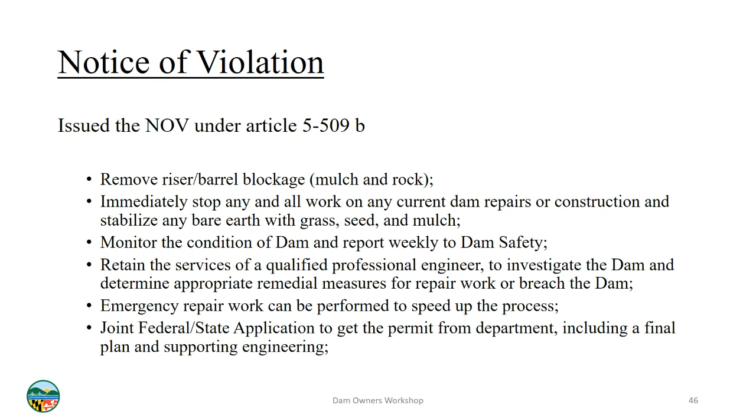So the department issued a NOV under Article 5-509B: remove the riser barrel blockage, mulch and rock, immediately stop any and all work on the current dam repair or construction, stabilize any bare earth with grass seed and mulch, monitor the condition of the dam and report weekly to dam safety, and retain the services of a qualified professional engineer to investigate the dam and determine the appropriate remedial measures for the repair work or to breach the dam. Emergency repair work can be performed to speed up the process, and apply with the joint federal/state application to get the permit from the department, including final plans and supporting engineering.

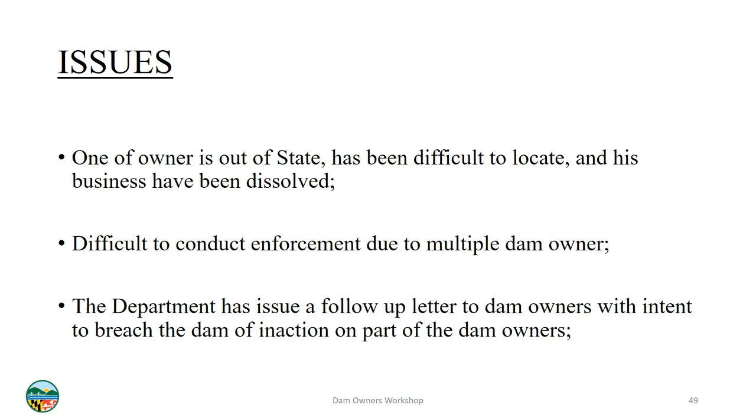After 2-3 weeks, when dam safety did the second inspection, the funny thing is the riser structure was completely blocked with concrete, and the existing outlet pipe was removed. When we asked the dam owners, they said they don't know who did it. There are some issues: one of the owners is out of state, has been difficult to locate, and his business has been dissolved, and it's very difficult to conduct enforcement due to the multiple dam owners. The department has issued a follow-up letter to the dam owners with intent to breach the dam, due to inaction on the part of the dam owners and the unsafe condition of the dam.

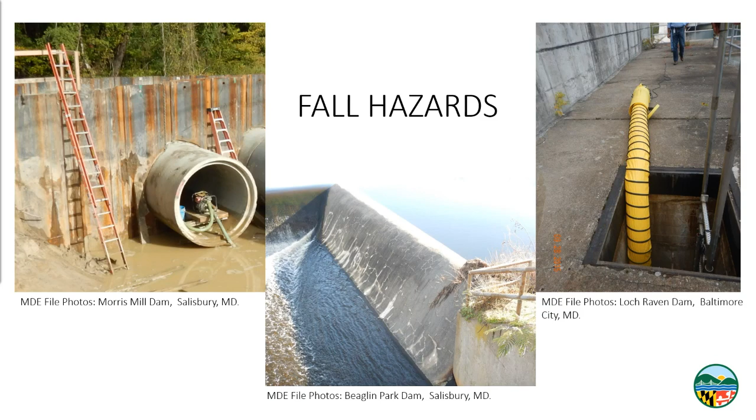So before entering a work site, you want to make sure that you assess the site and make sure that you're aware of any potential hazards on the site. And you also want to stay out of the swing radius of equipment.

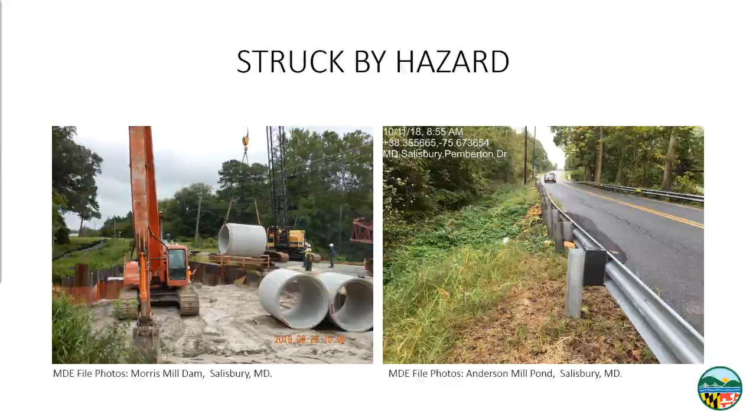Okay, next I'm going to talk about what a confined space is. So OSHA defines a confined space as being large enough and so configured that an employee can bodily enter it. It has limited or restricted means for entry and exit, and it is not designated for continuous employee occupancy. And Section 1926.1201(a) specifically includes storm drain manholes and storm drains.

And then furthermore, Maryland Code defines confined space as having limited openings for entry and exit, and as being subject to the accumulation of a combustible agent or an accumulation of a toxic agent, or it can have a deficiency of oxygen. And again, Maryland Code specifically in section 5-602 includes pipelines and tunnels. So consequently, tunnels running under dams can be confined spaces.

So just to reiterate, storm drain manholes, pipes, and tunnels are confined spaces specifically listed in OSHA regulation or Maryland Code. So it's the responsibility of employers to ensure that a competent person identifies all confined spaces at the workplace and identifies which confined spaces require a permit.

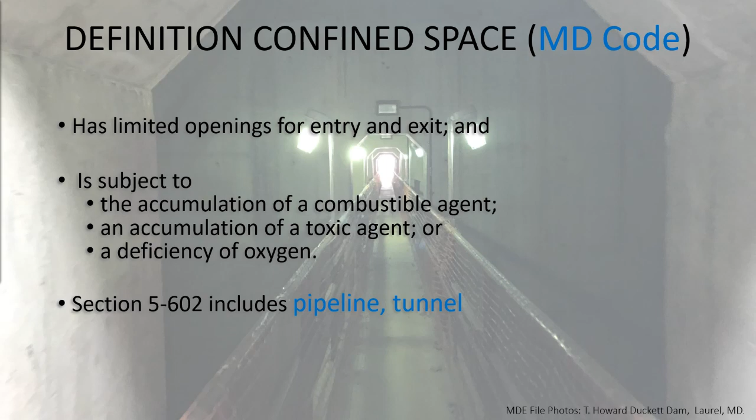So a lot of dams in Maryland have a riser structure and a principal spillway pipe. So are these principal spillway pipes a permit required confined space? So the first thing an employer should do is refer to OSHA's definition of a permit required confined space. So OSHA's definition says that a permit required confined space has the potential to contain a hazardous atmosphere. It can contain a material that has the potential to engulf an entrant.

It has an internal configuration such that an entrant could be trapped or asphyxiated by inwardly converging walls or by a floor tapering to a smaller cross-section. And it can contain any other recognized serious safety or health hazard. So a principal spillway pipe has the potential to contain a hazardous atmosphere, and it also has the potential for stormwater to engulf an entrant in a storm drain. So based on these two potential hazards, a principal spillway pipe meets OSHA's definition of a permit required confined space.

So what is OSHA's alternate procedure for entering a permit space? So the alternate procedure allows entrants to enter a permit required confined space when the only potential hazard posed in the permit space is an actual or potential hazardous atmosphere. But in order to do this, the employer must meet other requirements. And first of all, you have to eliminate or isolate any physical hazards.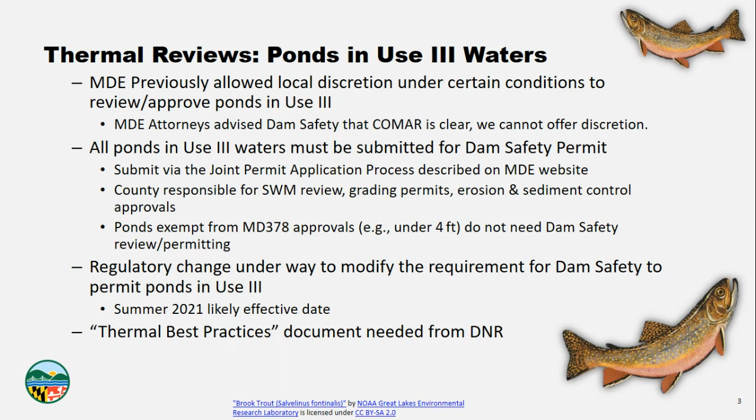But in the meantime, if you do have a project in a Use 3 watershed, it does need to come through dam safety for a permit. The county would still be responsible for any stormwater management or grading permits, erosion sediment control. The one thing to note is that if a pond is exempt from approval under Maryland Pond Code 378, for example, ponds under 4 feet embankment height, under 6 feet embankment plus 40,000 cubic feet of storage, or excavated ponds, it is our position that you don't need that dam safety review and permit because you would have been exempted from a 378 approval anyways.

Next hot topic, of course we can't avoid it, is the impact of a changing climate. It's hard to deny it's changing. More intense storms, bigger temperature swings, prolonged drought periods. So we are looking at, are there any changes necessary in the design storms? We've mentioned today that we've got some grant money to explore updates to Atlas 14 and a state-specific probable maximum precipitation study. So those are in their fledgling stages right now.

But there are bigger questions. Is the 100-year, 24-hour design storm still always the appropriate design storm? Should there be an Ellicott City kind of replicate extreme short duration, extreme event analysis performed as well? So these are questions we're asking ourselves and chewing on. We'd love to hear input from folks. So if you have ideas, please reach out. But those climate change issues are something we are working on.

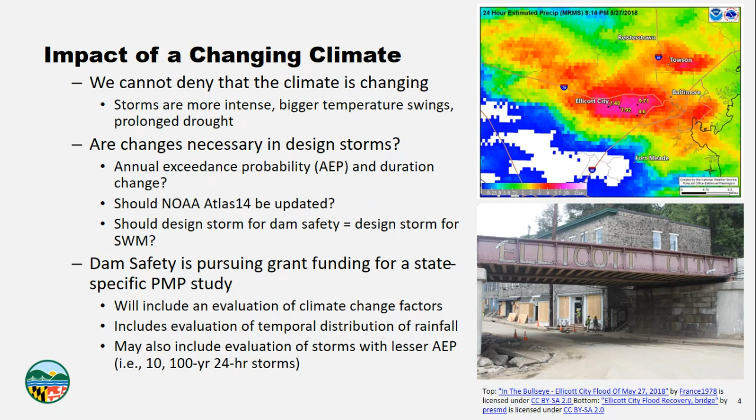Also, the maintenance and age of dams and the lack of maintenance is a perpetual problem. And it seems like during 2020, it became even more in the spotlight.

You may know that the average age of an inventory dam in Maryland is over 50 years old. And while earth and concrete structures are generally robust, a lot of the components of dams are aging. And we've mentioned owners that change hands from maybe a farmer to a developer to an HOA. We're finding that the new owners have little idea of the required maintenance or obligations for their dam or small pond.

And then that raises a bigger question. Who is responsible for inspections or enforcement of these structures? Is it a local agency or a state agency? So again, we're reminding folks that farm ponds are not exempt from maintenance activities, upkeep, the need for permitting or approval for repairs. And we really want to encourage and engender an all hands approach to the issue of aging infrastructure in the state. Partnerships between state and local agencies, engineers, the private community, all of the above is really what's needed to make sure we have dams maintained in an acceptable condition and removed if no longer needing value.

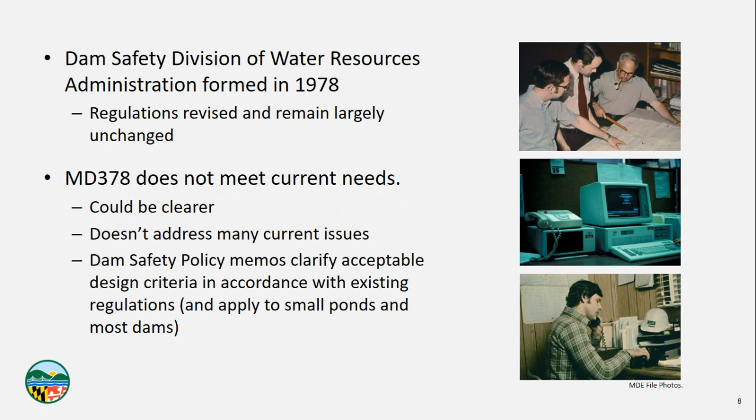So I'm going to just go through them one by one and give you a very brief description of what they contain. And they're all on our website, available for download. So if you want to dive into them deeper, I highly recommend becoming familiar with them.

The first policy memorandum expands and replaces a 1993 memo about plantings on roadway dams. The idea here is we want to clarify the stance and clarify the expectations for what a woody-free embankment and buffer zone mean. We'll define it through some diagrams and pictures and talk about steps necessary to remediate a dam if there is woody vegetation on it.

Policy Memorandum 2 resolves some confusion in the existing Maryland 378, the special embankment criteria, as it's been called, of when a roadway culvert exceeds the straight face test on it being a culvert, and it's really acting as a dam. This one actually has been revised multiple times as we look for clarifications and get feedback from stakeholders. Clarifying, adding more context, making sure definitions are consistent. These are the kind of things that we're putting in these memos. And so this is memo 2 in a nutshell.

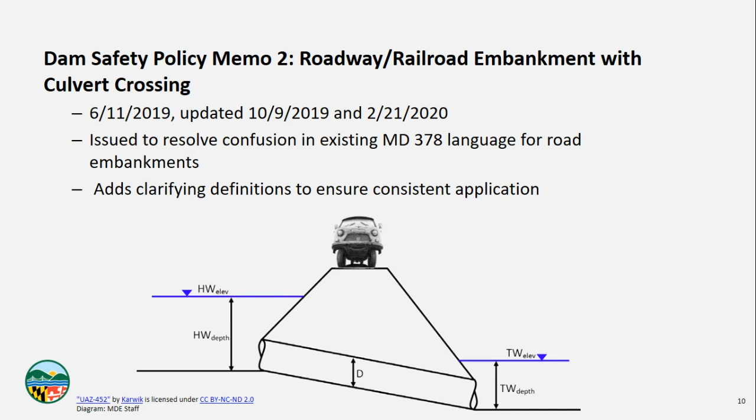Memorandum number 3 is, you know, an oddball, I would say. It's applicable when you have a dam or small pond at the crest of a steep slope. We had a few small pond reviews where we noticed the incredibly steep slopes, and from a geotechnical, geologic perspective, if you look at it, you're really relying on that steep natural slope to act as a dam or retain water. And the question is, is that adequate? Is that geotechnically stable enough to not only hold the water back from an impervious standpoint, but also is it stable enough from a structural standpoint? Could it have a slope failure?

So we've discussed the potential dangers of siting your structures too close to these steep slopes, and some recommended setbacks or offsets that you could apply if you don't have more advanced geotechnical analyses to support the location being a safe one.

In 2018, we released our draft hazard classification and dam breach guidance document, and that will probably be finalized in the coming year. But the policy memorandum number 4 was a tack-on that we added to that after it had already been put out there. And what we were seeing is some extremely small, quote, bathtub-sized stormwater management facilities. There was question on, do we really need to go this far and do this much effort in a dam breach analysis?

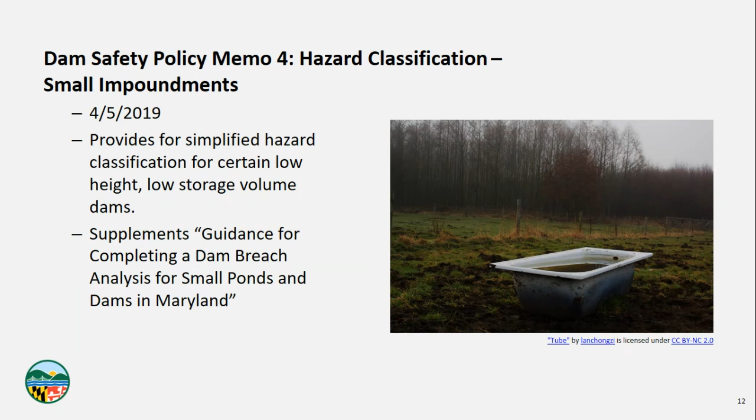All right, policy memorandum number 5, titled Best Practices for Construction of Dams and Small Ponds. This one has been under development for quite a while. We're coming up on 2 years now, to be honest, but what we're trying to do is supplement the Pond Code 378 specifications, which lack detail and comprehensiveness to actually be a true specification to hand to a contractor.

So the idea is we're developing this document to aid designers, contractors, and inspectors so that they all know their roles, the things to look for, the things to expect. What's the expectations of quality of construction and construction inspection and QA/QC activities we would see for a dam or small pond.

But again, there's a lot of stakeholders who have provided really valuable feedback, including the State Highway Administration, and we're kind of working hand in hand with them as they revise their standard specifications to incorporate some of these thoughts, and we're working to sync up releasing both documents. That's why it's been lagging, but it'll be out there soon.

All right, there's always been a big question about what to do when you want to remove a dam. It's not as simple as cutting a notch through the top of a dam. There's environmental and stakeholder concerns. There's how do you design the breach adequately? It's an important process because some of these dams and ponds are really community assets, whether or not they're owned by the community. So a removal can be a challenging project just from a public relations standpoint.

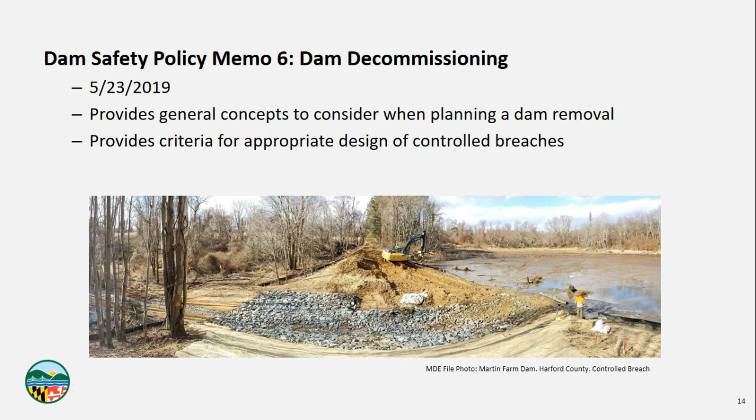So we take some information from some best practices put together by others, also point you to some of those dam removal NGOs who have experience managing removals, point you to some of their guidance. And then we've had for ages unwritten criteria on how to design a breach adequately. And we're simply taking that unwritten guidance and writing it down. So now you know what we expect if we're reviewing a permit application to remove a dam.

Going on with permits, we've had a permit condition for a long time that states that you need an impoundment filling plan when you first construct a dam. A dam that's newly constructed is probably at its most vulnerable state, statistically speaking, and more dam failures have happened on first filling than in prolonged service.

And it's important to remember that first filling doesn't mean the first time you just put water into it. First filling can be thought of as the time it takes from when it first gets a drop of water till it actually meets its design storm, right? So you may have not actually stress tested your dam to its full design capabilities until you get that 100-year storm or even greater.

So an impoundment filling plan, the idea behind this is because this is the critical time in the dam's lifespan, the plan describes the rate of filling, the conditions to look for, the frequency of monitoring to look for distress or other signs of problems at a dam. We've had this permit condition that one be filed with us before a dam is filled for a long time, and people ask, well, what do you want in that? What is an impoundment filling plan? So we've taken some guidance from the Army Corps of Engineers, distilled it, simplified a little bit, and put it into this policy memorandum so you understand what we're looking for when we ask for that.

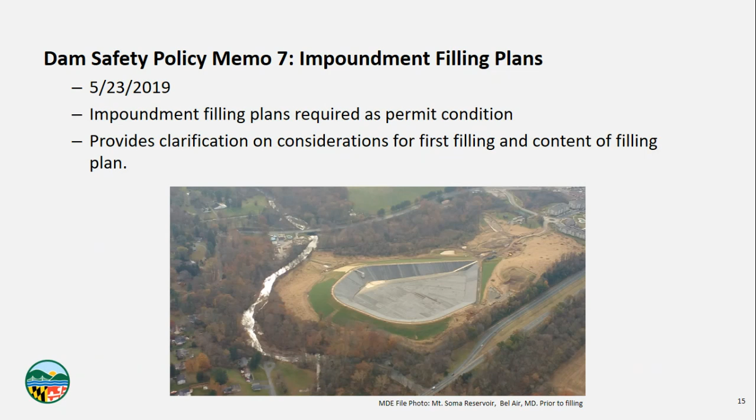All right, policy memorandum number 8 is structural considerations for risers and trash racks. This is another one that's been under development for a while. We've received stakeholder input from various groups. And what we're trying to do here is clarify the design guidance where COMAR and 378 talk a little bit about structural design, but they don't really get you enough information to have a finished product.

And oftentimes what people are doing is great and perfectly adequate, but there are questions that arise and there's inconsistencies. Or people ask, why are you asking for X? Because there's nothing that tells me that I have to do X. So we're just trying to put this document together. Another one that, in this calendar year, should be out on the street that describes our expectations for things to consider when you do these designs.

And when I say consider, that's important because it may not apply. It may not be a strict, you shall do this, you shall do that, but it may spur the designer to ensure that they're on the right thinking train as you design it, because sometimes there's many ways to arrive at the solution that's technically adequate.

All right, moving on to policy number 9. This is our water storage and collection tank policy. The definition of a dam in Maryland regulations and law is broad. I mean, you could be a little silly here and say that a glass of water could be interpreted to be a dam built for the purpose of storing or impounding water. So the question about underground or above ground or partially buried tanks has come up in the near recent past.

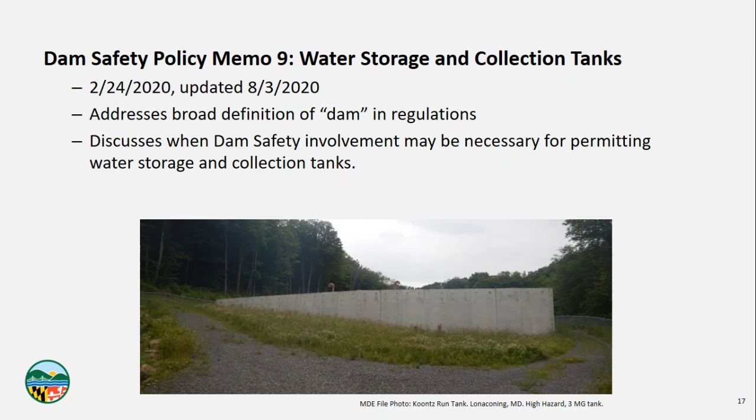All right, number 10, utilities and dam embankments. I think we all know that a utility that is within a dam embankment is a potential weak spot. It's a potential weak spot because whether it's carrying some kind of fluid, air, water, sewer, or it's got hazardous material in it, it has the potential for breakage and damage to the dam.

It's also got the potential where a utility contractor may not realize that they're digging in a dam embankment when they place these utilities, and they could be doing damage to the embankment that they don't even realize if they're, let's say, digging up and replacing a water main. So it's policy memorandum number 10. Again, make sure that we're all aware that utilities within dam embankments and near dam embankments need special treatment and what that special treatment might be.

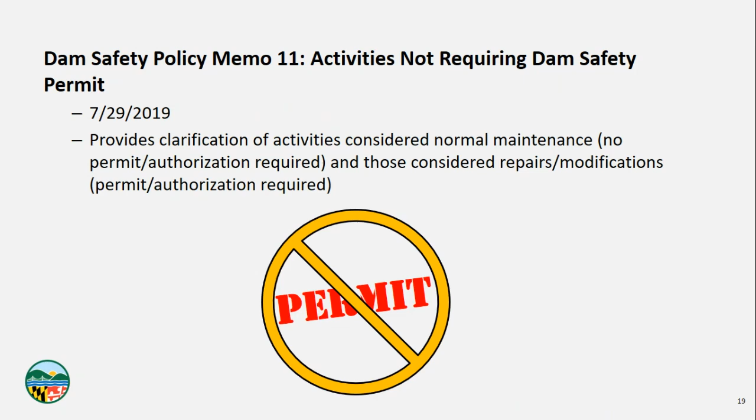Policy memorandum number 11, I talked about it earlier today. It's our clarification of activities that we consider routine maintenance that do not require a permit or authorization. And then lastly, I've mentioned 3 now. This is the 3rd of policies that are under development, but they're very close, I think, to the finish line. That was policy 5, 8, and now 12, which deals with excavated ponds.

You might be saying, well, 378 already has an excavated pond section, right? But there's some contradictory language in 378. It says if an excavated pond has a spillway that could fail, it needs to be treated as an embankment pond. And that opens up a whole other can of worms of questions. When the NRCS originally developed 378 or predecessors, the excavated pond was really truly excavated, a hole in the ground dug out by typically a farmer for livestock watering and things like that.

And as we've evolved and incorporated more stormwater management practices, what constitutes an excavated pond has changed. And now we've got what we call closed storm drain system ponds. That's, for lack of a better terminology, what we use internally: you've got a largely excavated structure, no embankment, but it's got a spillway because it basically discharges into a large storm drain network. How do we handle those?

So we're just trying to bring 378 in line with the times, reduce some of the ambiguity that's in there, and that's something we look to get out again this calendar year, hopefully the sooner the better. So that's what's out there and coming soon, but there's more.

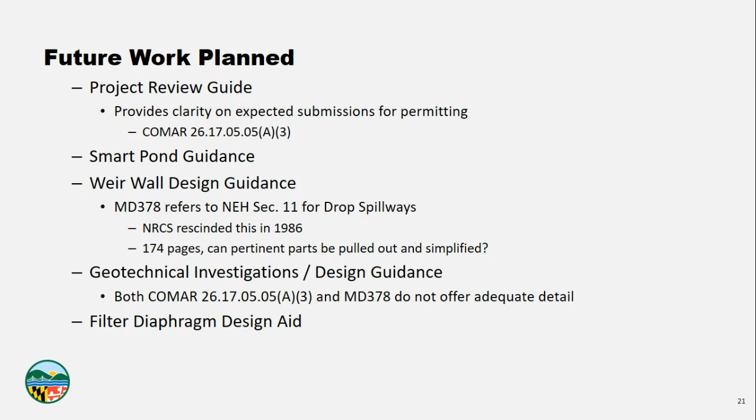We also have some geotechnical investigation guidance and design guidance that we look to put out to supplement regulations and 378. I'll be talking tomorrow about some considerations for investigations, and hopefully converting that presentation into a guidance document. We'd like to put some filter diaphragm design aids out for people.

Some considerations for dam siting, right? So that we are aware of setbacks required to adequately maintain a structure, to have adequate access to it for maintenance or emergency needs. Ways to avoid having multiple property owners. Well, it's not that you can't have multiple property owners, it's just that it gets much more complicated when you have people with little slices and sections of a dam, and they're all collectively responsible for it.

And then possibly last, Visti mentioned some risk-based and risk-informed decision-making processes in his HHPD presentation. We've got some great feedback from our friends at U.S. Fish and Wildlife Service who have some screening level risk analysis. This is kind of a real qualitative dive into your dam and understanding risk drivers and factors for potential failure modes.

We think a better understanding of risk as it pertains to dams can help owners understand their assets and have an asset management strategy, but can also help inform the state of what's out there. So at this point we're maybe getting a few years down the line, but putting out some kind of guidance for that as well. And there's going to be more things that come up as questions get asked, and we say this is something we can easily answer in a guidance document and put out there as we're developing regulatory changes and design guidance changes.